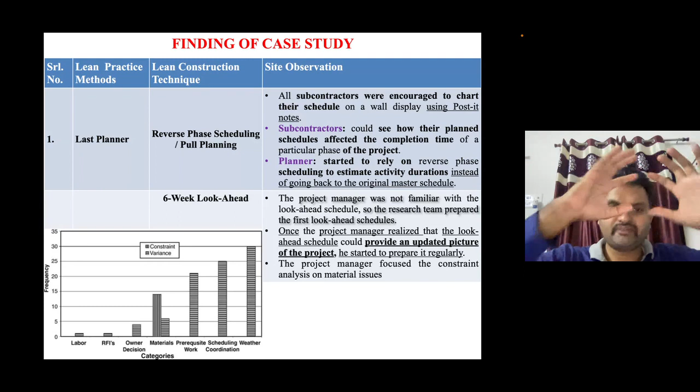So we have already started discussing the case study part, right? We have seen the last planner last time. We have seen how the last planner, when we are doing the execution part, has been moved to a 6 week look ahead plan. It means whatever broader level scale planning we have done for my project, I'm going to look after for the next 6 weeks, or sometimes in our case maybe 1 month. But in this particular site, they are seeing the element for a next 6 weeks look ahead plan. Right, so we have already seen this last time.

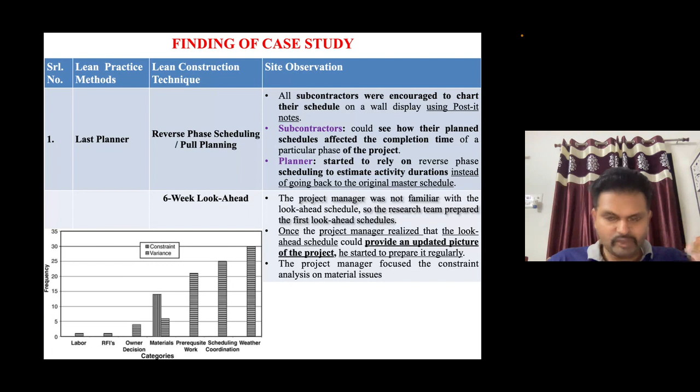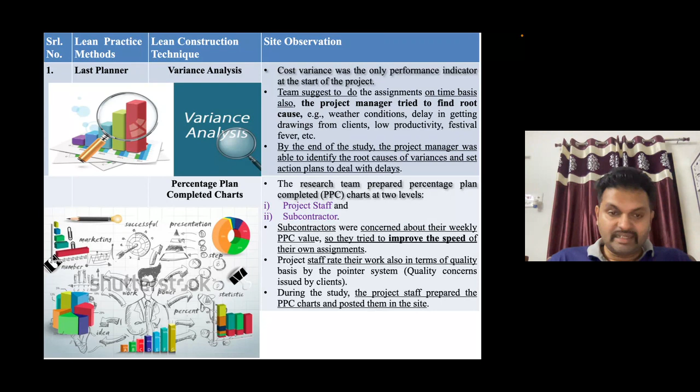Similarly, the variance analysis, right? Before that, they were just finding out or tracing out the duration. But now the project manager will try to find out the reasons behind the delay, or maybe the root cause of the delay. So we have seen the different teams available for doing the same.

Even the increase in visualization, right? In terms of commitment charts, we have already seen the GC's vice president used to sign. We have also seen the example of L&T.

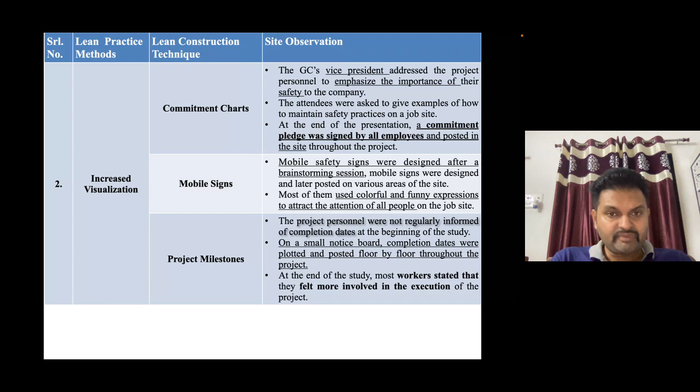Similarly, the mobile signs, project milestones, group meetings, right? In that they have created an initiative of not calling for only the engineers or managers of the front site, but even the foremen, experienced foremen, company foremen, those who are very experienced and working for the company on the company payroll. They have also been called for the meeting to give their inputs, critical for the different critical elements.

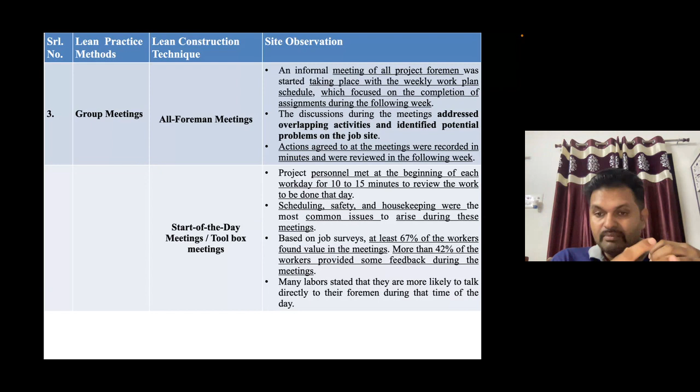Even the toolbox meeting, or we have seen the start of the day meeting. So we have seen the stats already, how many of the laborers find it interesting, how it is much more effective, right? Only by spending 10 to 15 minutes.

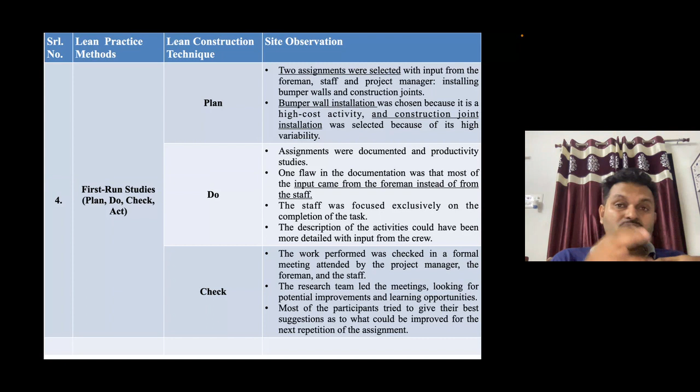Similarly, the plan, do, check, act, means the first run studies. So in that, what they carried out, they have taken two important critical elements to understand the plan-do-check-act in the site. So what they have taken is the bumper wall installation and the construction joint installation for the study of the material.

So they have done all the basic level of planning into these two construction elements of that complete case study building, right? Then in the 'do' condition, they have allowed all the inputs to come from different stakeholders, like the foreman, the frontline engineer, and the manager, and according to that the plan has been slightly modified by taking all the critical elements into discussion. Then before starting with the execution, everything has been cross-checked, everything has been scheduled into a micro level, and then the actual execution part has been done.

And after doing that actual execution, it has been found out that the result shows more than 38% reduction in the cost of the bumper wall. So you're able to see around 35 to 40% reduction in the bumper wall, which is one of the most expensive activities of that particular building, and 73% reduction in the cost of the construction joint. So that is the output which we are able to see in this lean practice followed on the site.

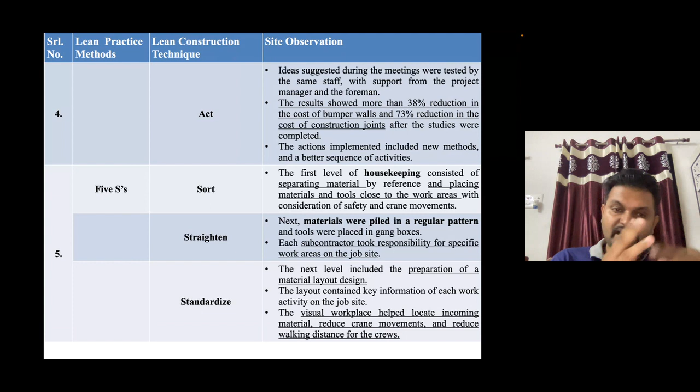Then the 5S, in that the sort means appropriate housekeeping has been done. So all the material has been sorted, kept separately into their specific areas, right?

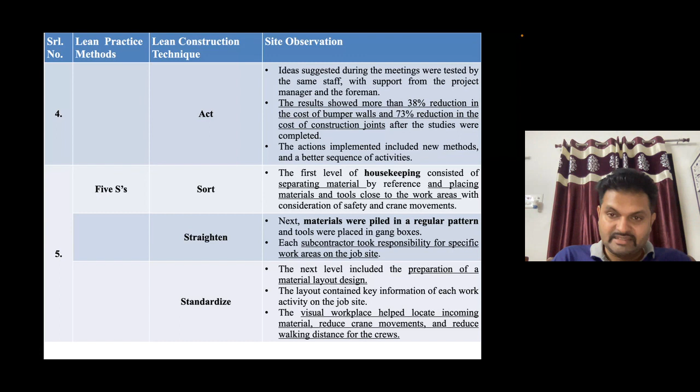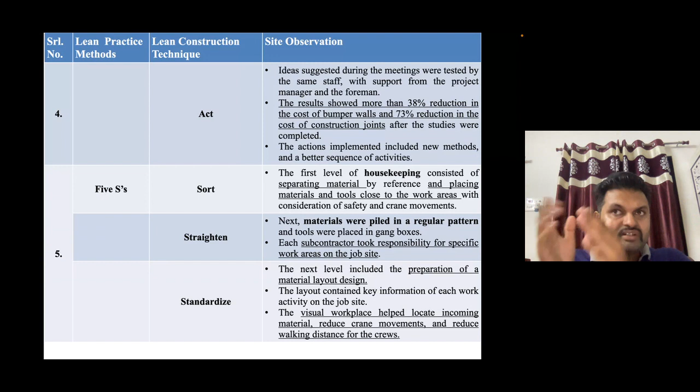Then the standardize, right? In that they have prepared a material layout design, right?

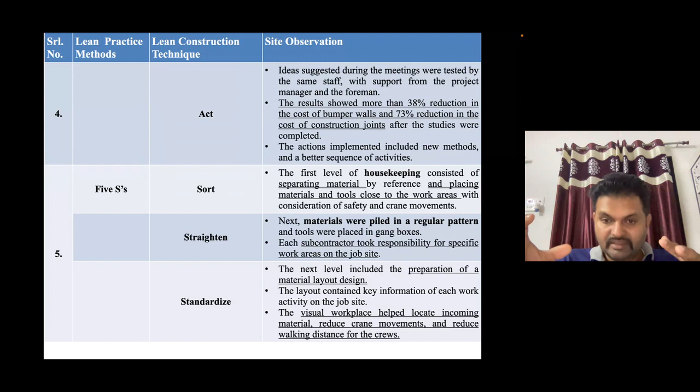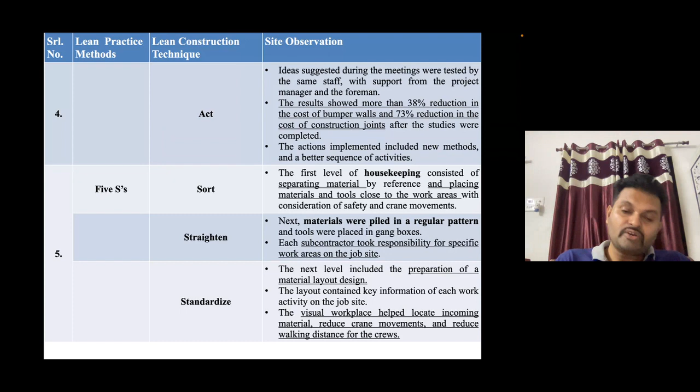The site looked much better in the visualization. The laborers are feeling much safer and much more productive on the site. There is a lot of enough space created for the maneuvering of the crane. And the repetition, what we call the principle of less movement of material, that has also been followed in this particular site.

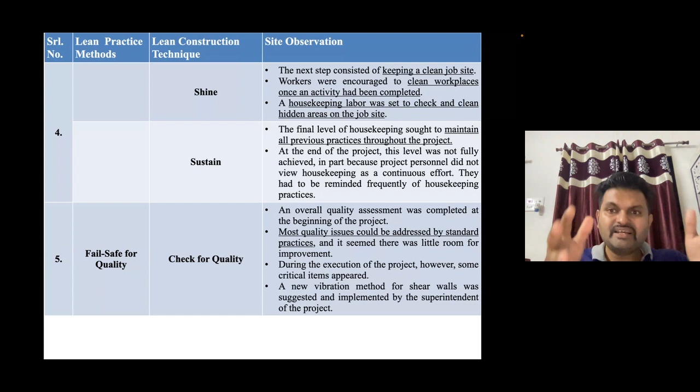Similarly, there's shine, that is keeping the job site clean. What they have done in this particular site is, out of a gang having a large quantum of labors, for example around 30-35 laborers, they have dedicated a single labor with this responsibility. That labor is responsible for keeping the site clean after the construction activity. For example, if any construction activity is going on, he just needs to check that he's keeping the site clean, or after the activity, that the workplace has been cleaned and appropriately stacked. For example, if some shuttering work is done and extra material like steel props were used, he needs to take those extra steel props and restack them where they belong in the site. So that is the work allocated to one labor of a big gang for the particular zone, as per the zoning they have done.

So a housekeeping labor was set to check and clean the hidden areas of the job site.

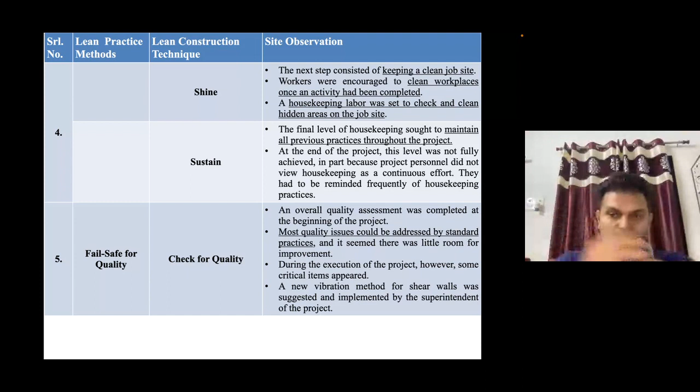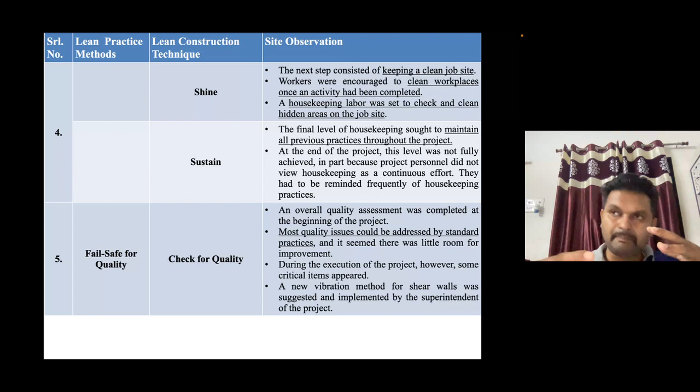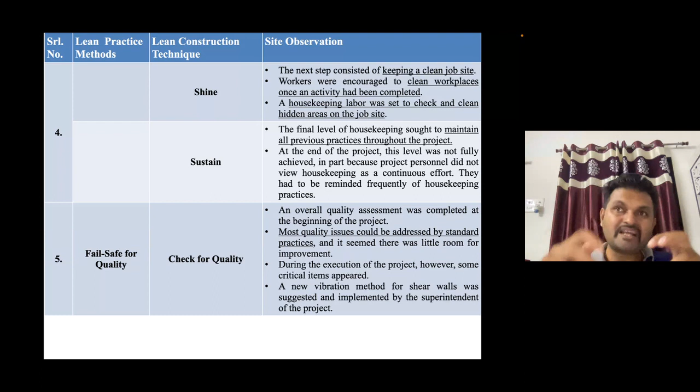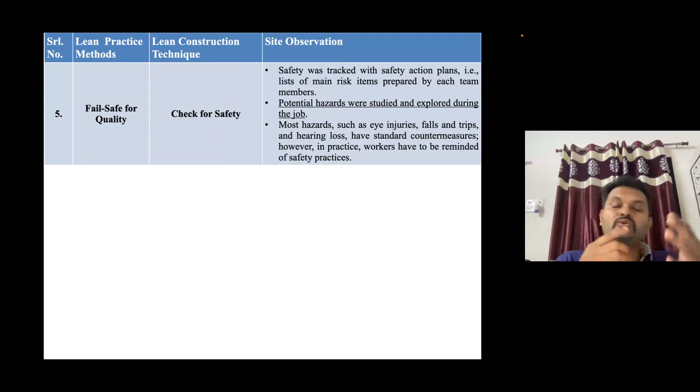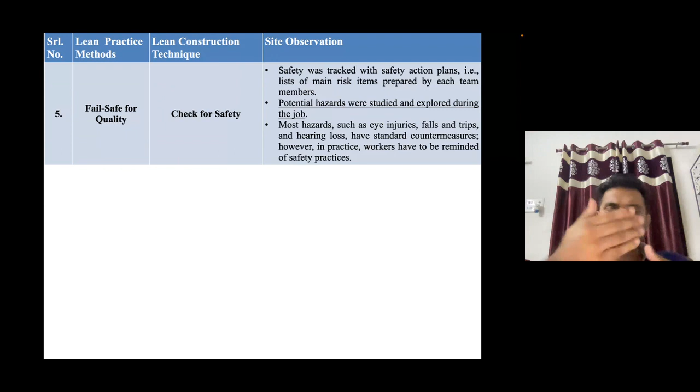Then there's the fail-safe for quality, that is the check for quality. All the things have been tried to follow with the QMS, and more power has been given to the quality person. Similarly for the safety person, they have given much more power, so they are in a more commanding position. When they are given more power, they report directly to the project managers, which gives a threatening signal to the frontline engineers that they need to follow quality and safety requirements. Otherwise, if they don't follow, everything will be conveyed to the project managers, and in reverse it may hamper their progress or promotions. So this is what they tried to follow on the site.

Okay, so we have already seen many of the parts, we have just covered the remaining part of the last element. So let's start with today's topic, that is advanced construction technology.

Okay, let's start with the first technology. Nowadays this is a very common scene, we are able to see concrete everywhere. If you're doing any kind of large scale project or high rise building, and you stand on your building at some height, you're going to find a lot of messy things around your site. This is completely a construction jungle. And the thing is very common, like the statement I have stated in the slide: Akshay, we need you right now, right here.

Some kind of spare parts were not available, or in terms of the precast site, I'm not able to find some of my components. I have unloaded some of my rebars of 32 dia, and I'm not getting it right now into my site. I don't know where it has vanished.

This thing is very common. The reason I'm saying this is that in our construction industry there are a lot of vendors, or a lot of subcontractors. So there's a possibility that one material can be consumed or used by some other parties or vendors. Here and there is a lot of possibility of getting theft, internally and even externally.

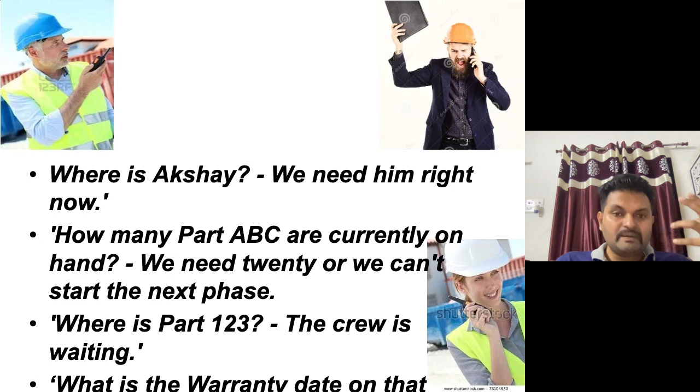These are very common things. We have kept something somewhere, and sometimes some kind of backfilling has been done, or some soil has been dropped onto that element. The element is completely hidden into the soil and I'm not able to trace it down. This is very common in our construction industry, specifically when the FSI is high, or into infrastructure projects.

But the issue is, what is the solution for such kind of things on our site? This is our first learning, or the first technology we are going to explore in today's session: the RFID, radio frequency identification device, in the construction industry.

Let's try to understand what exactly that is. This is not any kind of advanced technology. We have already used some part of it in our day-to-day life, but it is a little bit different. Let's understand the basic concept. RFID is a radio frequency identification device. It is basically an automated data collection technology. It is a wireless, non-contact system, and it works on the basis of a tag system, or a tag attached to it.

I will try to illustrate this with a very simple flow diagram. Just try to understand: RFID is like a paper kind of element, just a small paper, this much size. It is having a chip inside.

I am going to put that chip into my material. Just take a case, I am having a precast beam. I put that paper and stick it onto that beam, so that it is not going to wear and tear due to rain and all that - so that is a safeguard. I'm just going to paste, or stick, that RFID onto my precast beam.

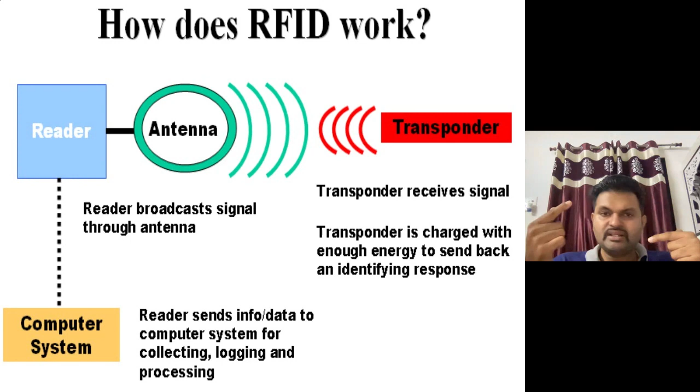So the working is the same. The active system has a battery, and a passive system does not have a battery, but the overall function is going to remain the same. Let's try to understand the difference between the two different tags available in the RFID category: the first is active and the other is passive.

In terms of power source, active RFID is going to have an internal battery. Passive does not draw from a battery; it draws power from the reader. Once the reader emits the signal, an electromagnetic field is created, and the tag starts to get power from that, and then it transmits the signal.

It takes them around 2 to 3 minutes to get charged, and then they reflect the signals. Typical lifespan is around 10 years for active, and passive is unlimited, like they go for 15 to 20 years. So I can reutilize this RFID into different projects also.

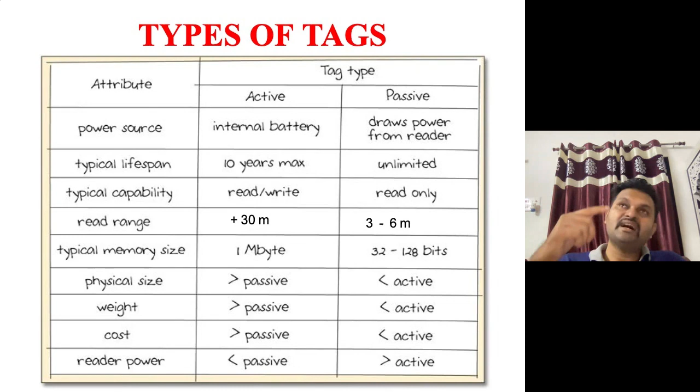Typical capability: in active, I can read and write. Once I allocate some system to that, I can rechange it, I can make it do a lot of differences. But passive is only read-only.

Read range: an active system goes for around 30 meters. If I want to go beyond 30 meters, if my infrastructure project is very big, I just need to install something to strengthen the signals. They can go for around 25 to 30 meter range. I put some antennas to take the signals and again strongly emit for the next 30 to 50 meters of range. So I can put an antenna if required.

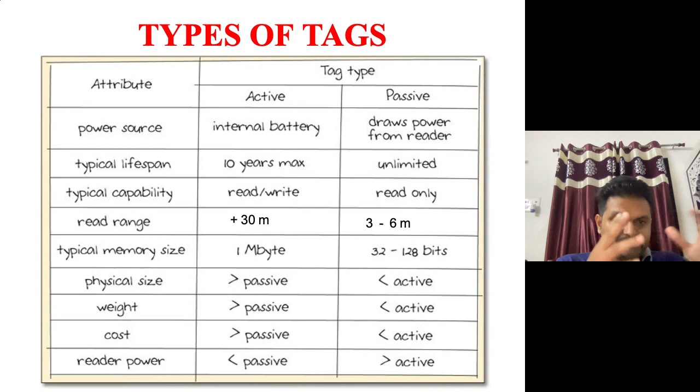Passive has a 3 to 6 meter range. Typical memory size is around 1 megabyte for active. For passive, it goes for around 32 to 128 bits, approximately the memory of a SIM card. You also have memory in your SIM card, where you can save numbers into your phone. That is the similar memory a passive type system has.

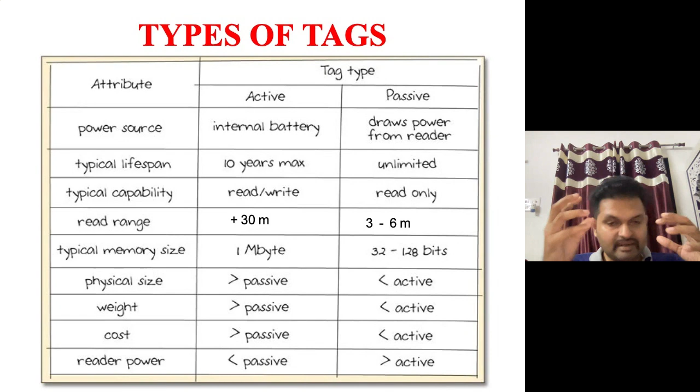Then if I talk about size, weight, and cost: active is a little bit more in size, more in weight, and a little bit more costly compared to the passive system. But the reader power is less for active and more for passive.

If I'm talking about the cost element, for a passive system, it depends on how much quantity you are ordering. For a quantity of around 500 to 800, the cost for a passive system goes for around 5 to 8 rupees, and for an active system around 12 to 18 rupees. That depends on vendor to vendor, how much competition there is, and how many tag systems you are buying for your site.

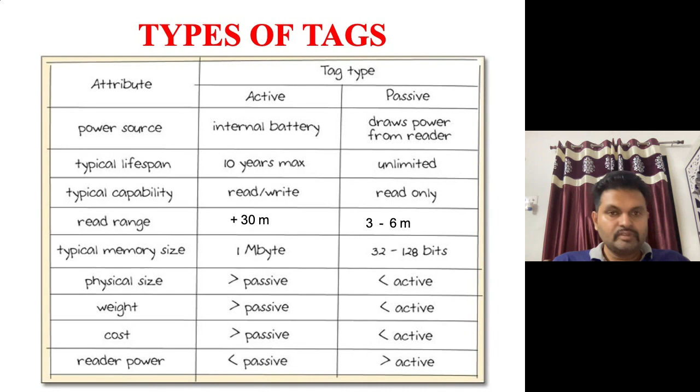There are a lot of competitive technologies. This is not the first time we are using this, nor is this the first generation of this particular technology. So let's see what are the competitive technologies which we use in day-to-day life.

For example, barcode. Most of the products which you buy from any mall or any recognized manufacturer company have a barcode. OCR, optical character recognition, is a little bit expensive, so it's mostly used in developed countries. Smart card, you've mostly seen office ID cards having smart cards. You just swipe it, and punch in, punch out is done, or door open is done. That is called the smart card. Biometric, you just need to do the punching. Similarly, we have biometric, face recognition, and even voice recognition.

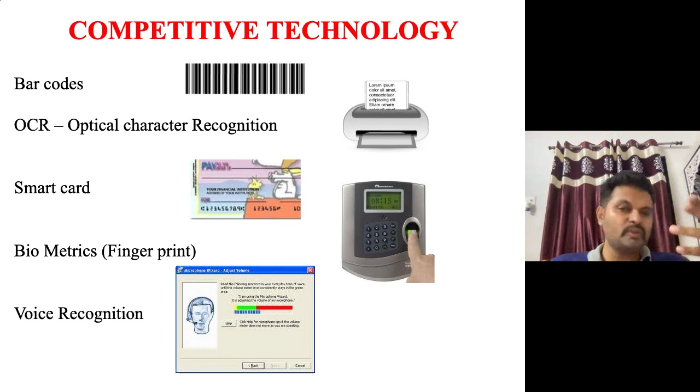Now, the most commonly seen among these is barcode technology, right? It's the most popular of all these competitive segments. So let's try to compare RFID and barcode, how RFID is much more suitable for our industry, and why it has been used and explored in our industry nowadays.

First of all, with barcode, whenever I need to detect it, the product needs to be in front of me, and the barcode detector needs to be in front of that product only. Only then am I able to recognize it, right? If I keep my material somewhere around and do the scanning without putting the laser in front of it, that is not going to be detected in the case of barcode. But RFID does not require any kind of line of sight. It transmits the signal for 360 degrees, so wherever my material is, I'm able to find it.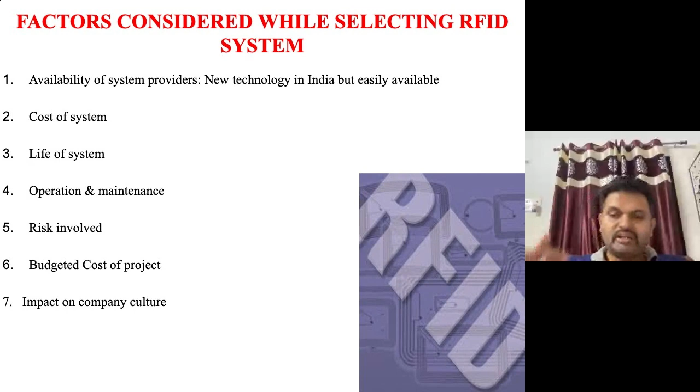Now let's see where I can expect applications of RFID in my industry. The first is security. How exactly can we put it into security?

Just take a case of security. Whenever my labor is coming into my site, if they have an ID card, in terms of security and even labor productivity, I can use it for both. How? I will tell you. Just take a case, there is an ID card allocated for all the labors, even for the staff.

So there will be an RFID tag within the ID card, attached between the front and back papers, so it's not visible to the labor. Every ID card I issue, I know which gang member it's issued for, whether carpenter or whatever, or even the name of the person I can write down, and I can assign different colors for different gangs as per my understanding.

That ID card can be used for access control and security control. Whenever they get in and out of the gate, I'm able to capture that. And it can also be used for productivity control.

Let me tell you, in the software, many RFID systems allow a boundary line. If I say within 100 meters, as per my project size, and if any person goes beyond that 100-meter range, I need to get intimation. So whenever someone carrying that ID card moves outside the 100-meter range, I'm going to get a pop notification, and that point is shown.

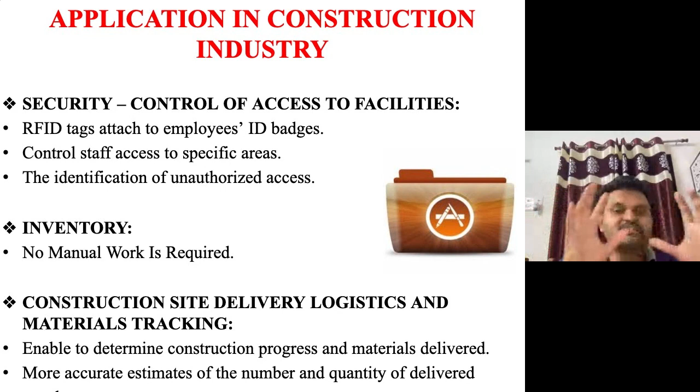It may show in blue, meaning he's a carpenter of this gang. So I'll know that person, say Rohan, is going beyond the limitation line I have set. It may be their working zone or my site boundary. So whatever boundary I've set, if they go beyond it, that means he's just wasting time on site, or went for lunch, or whatever. I can easily track that.

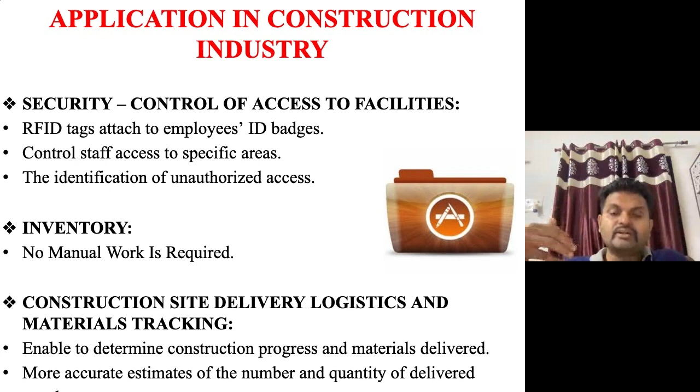Next, inventory control - no manual work is required. Definitely you get a lot of automation because of using RFID. Construction site delivery and logistics - if any kind of material is coming in, or sometimes RMC plants for concrete, or other materials, I can easily track them.

Document tracking is very important. For example, one of the most important and critical elements is billing. Whenever our file moves from my site to the client, it depends on how the flow works in my site. Sometimes from my planning department it goes to the consultant or execution team, then to their senior, then to the client side, then to the accountant. So it's very difficult for me to track every time.

I need to call and ask if the file has passed or not. To track whether the file has passed here or there, or now reached the accountant - if I have just a tag system in my file, I'm able to find the location. I get to know it's now with my senior consultant, now it's moved to the client side, now it's moved to the accountant. So I have a direct tracking system.

If I find out the file has been sitting for a long time, like 2 or 3 weeks, in a consultancy firm only, I can just give a call and ask if there's any issue or technical concerns, because I notice the file has been on your table for a very long time. And it just looks like a paper tag.

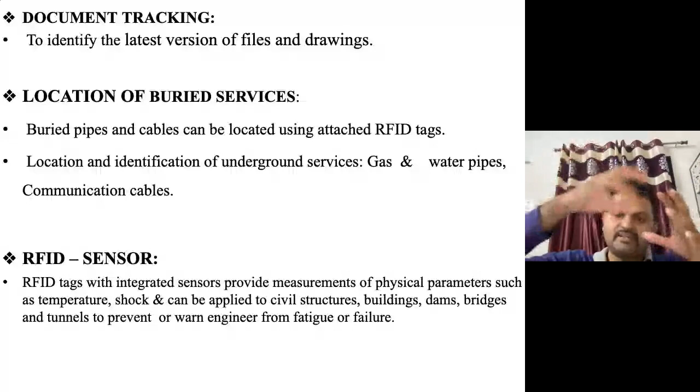So it's nothing like I'm changing the file location or file outlook, nothing like that. It's just like a paper file separator. It's going to look like that only.

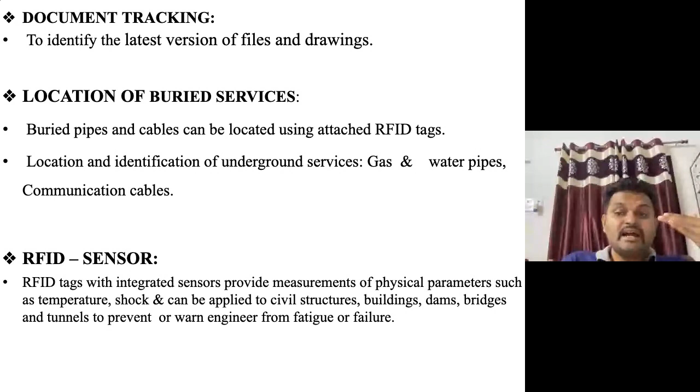Location of buried services is a very good part of this, because our industry has a lot of soil movement, everything is mobilized around. Many times there's a possibility that costly elements or materials fall into the backfilling or get covered with earth. In that case, RFID is able to trace the material even if it's buried 2 meters below the ground. For any reason, if soil has fallen over my material, I'm still able to identify the material up to 2 meter depth. That is a good part of my RFID system.

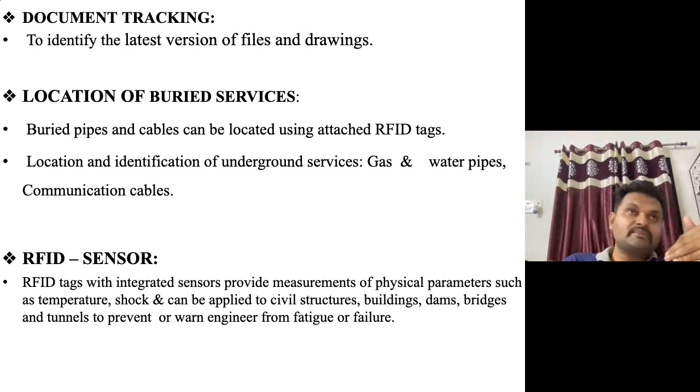RFID sensors - even some trial modes are going on where RFID can be attached to concrete, so that any kind of changes or thermal changes can be detected. Even RFID application is being tried in the field of dams, where we require a lot of monitoring. So if any changes are there, RFID can sense it. Some sensors are tried with RFID, so by using those sensors, RFID gives me signals of what is happening, and the concerned person can take steps accordingly as per the need.

So what I can conclude is that RFID is a little costly, but it has great advantages over the barcode. Even though the technology hasn't fully matured, there are a lot of opportunities. A lot of sensors can be put around with RFID, and many experiments or trial modes are going on. It's going to have very good customer service and more productivity on my side, and it's not that much of a cost element. It requires hardly a small amount, but has a wide range of applications, which makes my site much safer and an easier workflow.

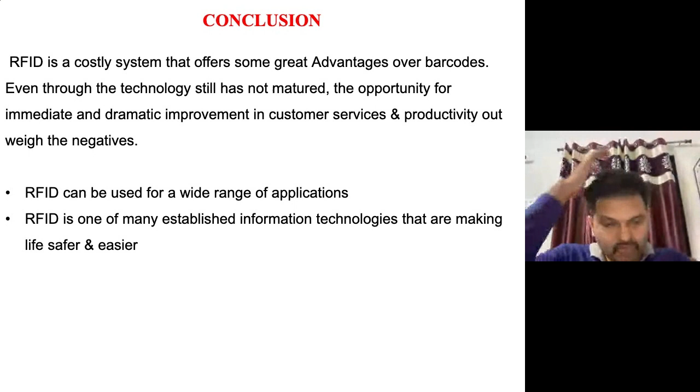So let's move to the second part of the technology we're going to explore. But before that, if anyone has any doubt about RFID technology, let me sort it out, then we will move to the next technology part. If you don't have any doubt, you can just say yes, continue, or we can go to next. Okay, good enough, so anyone is putting a question? Okay, so I hope we can go to the next, right? Okay, good enough, let's move to the next.

So the next technology is precast and modular construction, which I have written. Precast is not a new technology, but to give you the flavor of modular construction, I'm going to start with precast technology. Let's try to see what exactly that element is. We know precast technology - for example, there are two types of technologies: one is cast in situ, another is precast. Cast in situ means where I require that element, I am casting it there only.

For example, there is a plan and I require a column here. If in the plan the column is here and I'm casting the column here, that is cast in situ. But if the column is needed here and I'm doing it somewhere else - it may be on my site elsewhere, or in a manufacturing plant, or somewhere in another state - that's also fine. Everything comes under the category of precast. So I'm casting somewhere else, that is precast, and then assembling at that particular point.

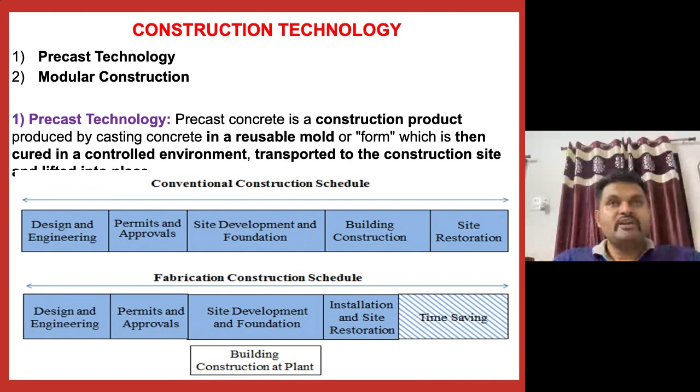But today we are not going to discuss precast technology. We are going to discuss modular construction.

For example, India has constructed, in 2013, around a 10-story building in 48 hours. So generally a normal six-floor or eight-floor building takes years to do, and how exactly are they able to make it in 1 day, 2 days, 48 hours, 56 hours? How exactly is that possible for a 10-story building? Everything is possible in modular construction, right?

Basically, modular construction is an advanced level of precast technology.

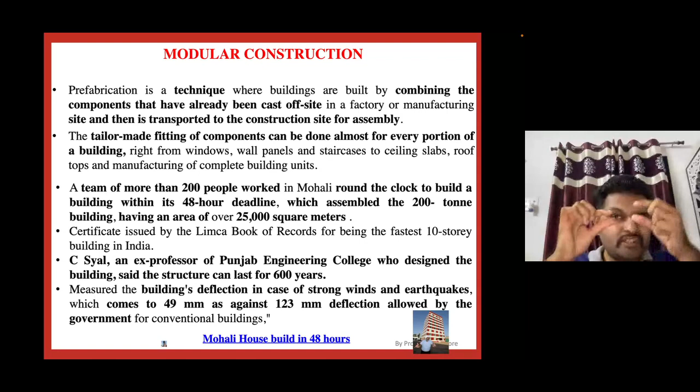I'll tell you an interesting fact. Take the case of AAC block, that's a different story. But when we have mortar in between bricks, whether red bricks or AAC block bricks, the main function of the mortar is making a key element. But the other function is that if any horizontal force like an earthquake comes, this mortar, which is not as solid as the blocks or bricks, tries to absorb that horizontal energy.

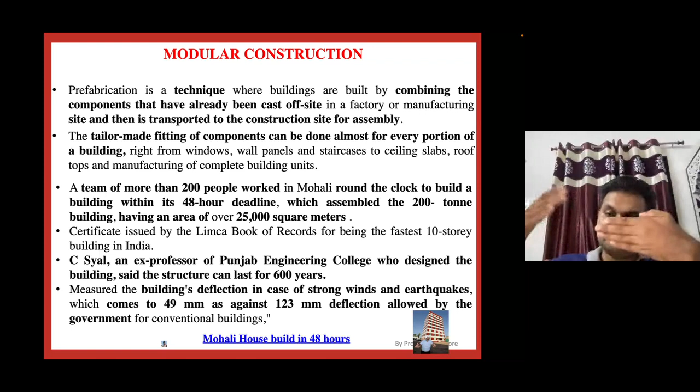For example, if I'm getting a force around x, in this part I'm going to get x minus some value, because in between the mortar tries to absorb that energy. But if the complete wall is solid, then if an earthquake comes, whatever shock I'm getting here, the same shock I'm going to get because it's completely solid.

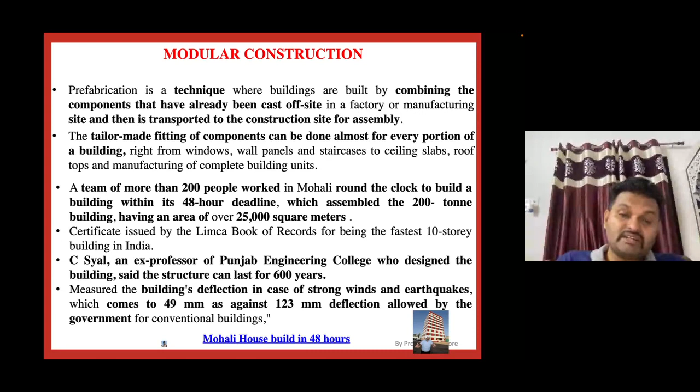But when I'm talking about modular construction, they have nut fittings, so the possibility of absorbing energy is more. I can reflect this with an important example. When we talk about building deflection, generally a standard 10-story building in a particular zone gives a deflection of around 123 mm. But the same building designed with modular construction gives a deflection of only 49 mm. So you're able to see it is much more secure compared to RCC construction.

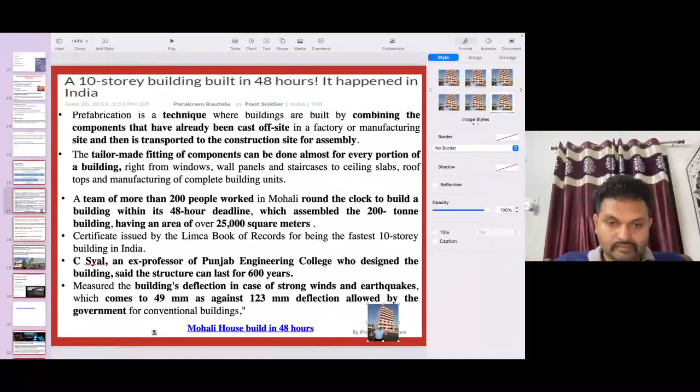Now some of us ask the question, why is the modular method important for buildings? Let's see. I'm not saying it is important or not important, but the reason is that in our construction industry, time is cost. Definitely, the more time involved, the more overcost and expenditure is involved. Because of the high cost, or the large time for construction, I'm able to convert that cost into the benefit of rapid construction.

Wherever I want rapid construction, I'll give an example of why it is needed. Take the case of the COVID scenario. If I need to do hospital construction, any kind of element, in a conventional way, it may require a long span. But by using modular construction, I'm able to build a large number of hospitals in a very short span.

Take another case, any country going for an international competition or conference where a lot of countries are coming. For example, Japan conducting the Olympics, or take an example of 2032. In that case, they need to make a lot of stadiums. If they go the conventional way, it's going to take time, and there's a possibility of project delays.

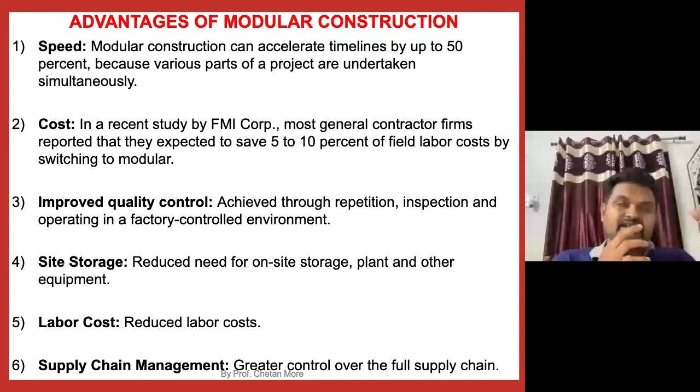Very high quality, much better finishing you are getting. Wastages are very less, right? Inside you require very less space for storage.

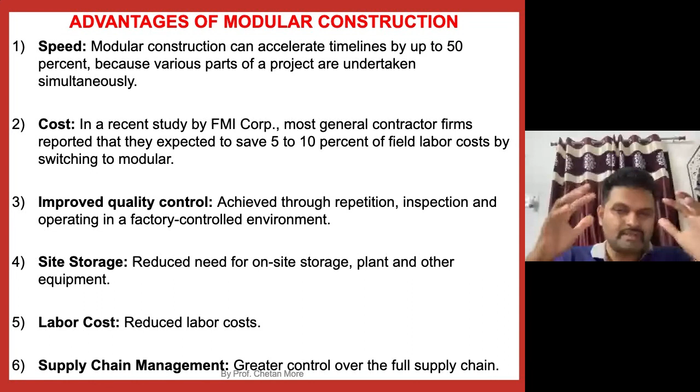So where the site is compact, where the FSI is very high, and the site is small because it's a high-rise building, you're not having much space to keep the materials. In that particular case, I can easily go for modular construction.

The labor cost is definitely on a lower scale. There's greater control over supply chain management. I don't need to depend on a lot of different vendors for different materials. I can have very good control on that.

Minimal impact on your business, right? For some kind of project where right now I'm not having that much cash flow, but in the future, without hampering my current building or current business, I want to go for extension.

Just take a case, I'm constructing an institute. I know that after some 3 years, I'm going to add three more stories to my school building. But I know that for a school building, if I'm adding two or three more stories, I need to close the building completely for a minimum of 6 months or 1 year. So I can't stop my school, college, or university for 2 years or 1 year or even 6 months. So how can I do the construction?

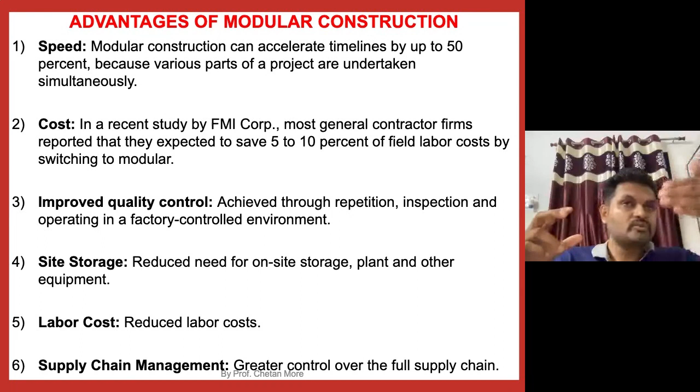In that case, I can go for modular construction, because even after the university, college, or school is over, I can do the construction in the remaining 5 to 6 hours, and still I am able to progress my work without hampering my existing business, right?

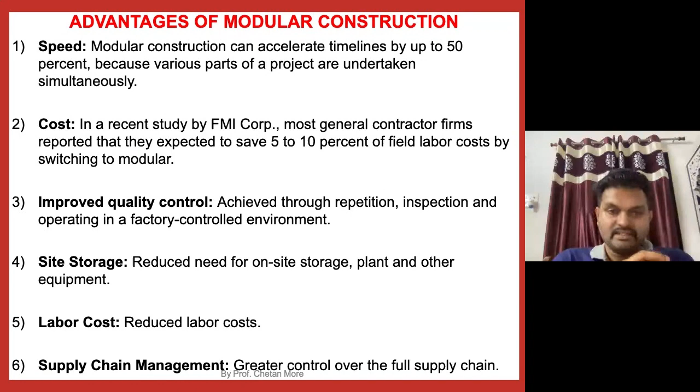Custom-made options are available. Whatever changes I want to do, I can easily do, and there is very less wastage at my site, with no doubt.

Definitely there are also going to be limitations, right? First of all, if I'm not going to follow proper procedures, such kind of accidents may happen at my site. Even the unavailability of technology is one of the issues we are having. Skilled labor, those who know modular construction, that is a lack. Even the lack of standards, right?

I will give you an example, like Modulex India. So if I'm talking about the prospect of India, Pune and Mumbai are very good in construction developments. Modulex India has invested somewhere around 100 crore, and they have made a factory in Indapur, so they can send their materials to the Pune and Mumbai real estate or construction industry businesses. So there are a lot of technologies being driven into the country.

Still, I understand you may be getting the basic concept, but there may be some concerns you may be having, like how exactly it will be done at the site. So I will illustrate a video that is going to sort out all your concerns and doubts.

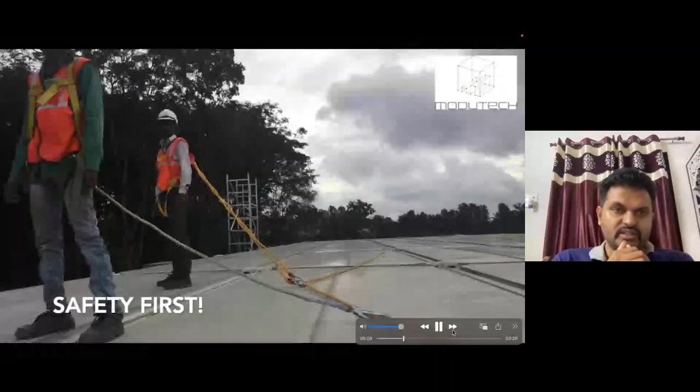So in this Pune site, there are a total of 36 modules. These are the complete modules. If you're able to see, all the metrics are within that module only.

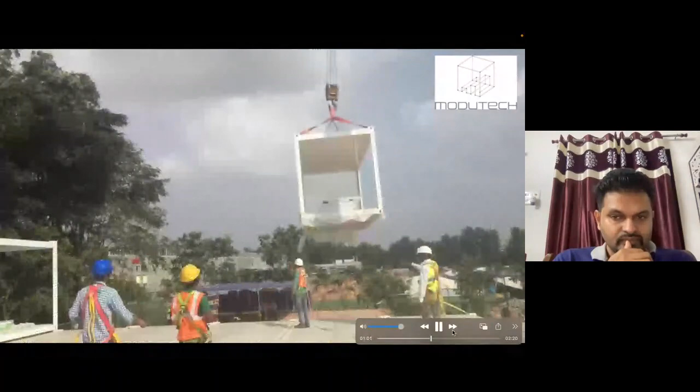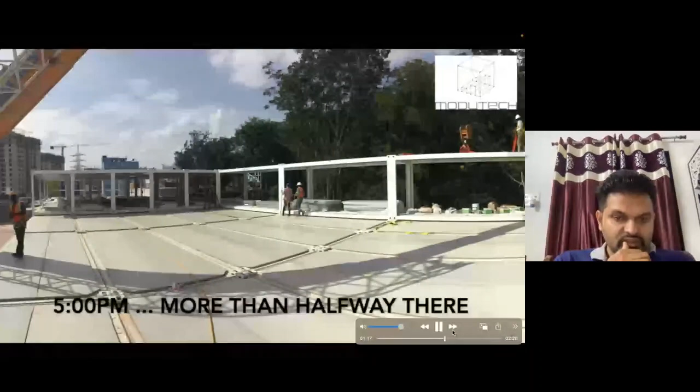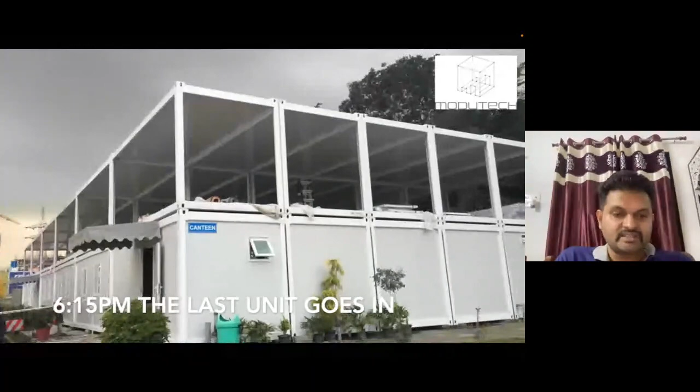The project started at somewhere around 3:30 p.m. By 5 p.m., almost half of the work is done. By 6:15, all 36 modules have been put into their places. Then bolting down of the units is taken care of, and safety verification has been carried out.

So the ground floor keeps working as functional, not hampering my current business. After 3 weeks, the complete work has been done in all respects, even with the interiors, all the plumbing, all the electrical, all the water sanitary fixed. Within 3 weeks, the complete office setup is ready to use.

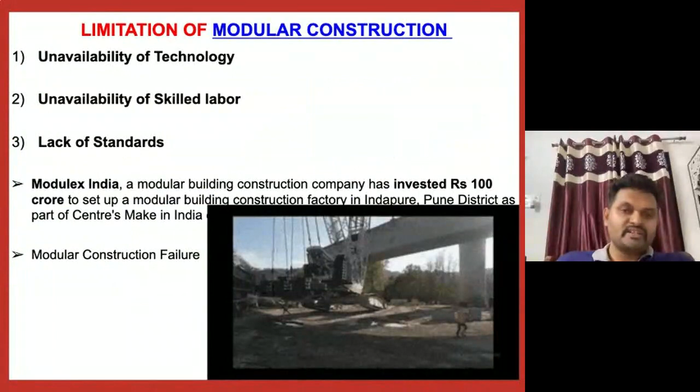So this is the way it works. Now you get better clarity on how exactly the modular construction has been doing the work at the site.

Now let's move to the next technology, which is 3D printing. Everyone enjoys 3D movies and 3D animations with great VFX. Similarly, with 3D printing, if around 5 or 10 years ago someone said you could construct a building using a 3D printer, you may have laughed at that. But today this technology is possible. Let's try to see what exactly the technology is, how it works, what the status is in different parts of the world, and how much they have advanced.

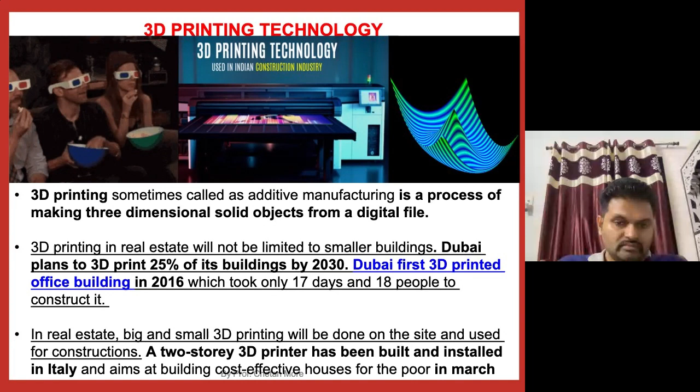But let me tell you, currently the highest building done in the world using 3D printing is only a two-story building, not much more than that. Before I go into more detail about the technology, I will show you a video so that we understand how exactly the work has been done, then we will move to the next part.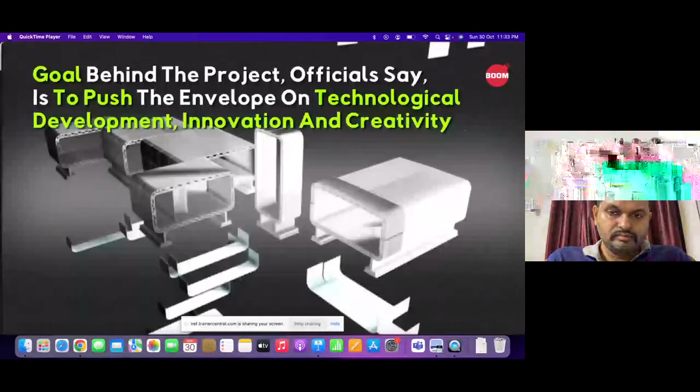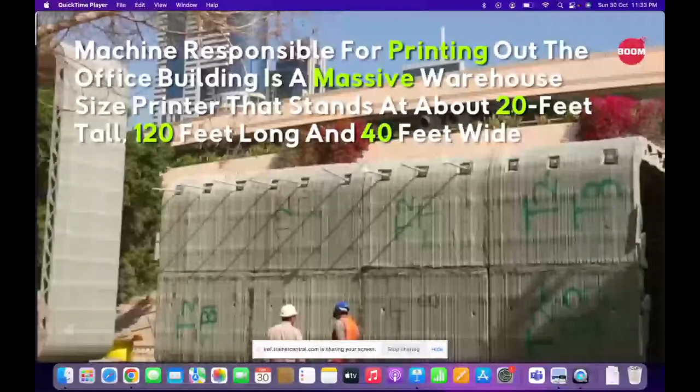So you can give any kind of shape, any kind of bend, by using 3D printers, which is very difficult with modular formwork.

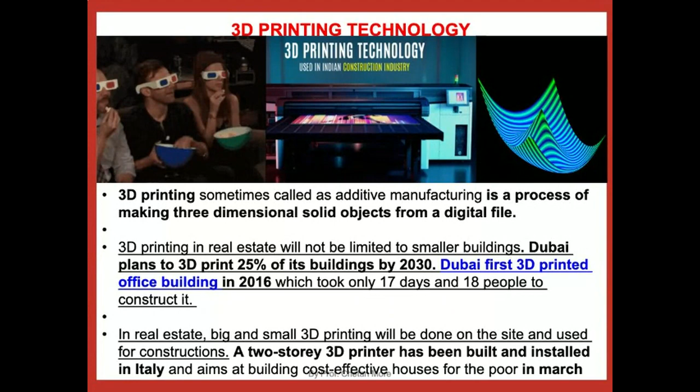Now let's get into more detail. Let's talk about the first 3D printing in India. As we said about Dubai, when we talk about adopting new technology into the Indian construction industry, even with precast, it took approximately 2 decades to come into the country. But now we are seeing developing countries adopting advanced technology much faster. Just take the example of 3D printing technology.

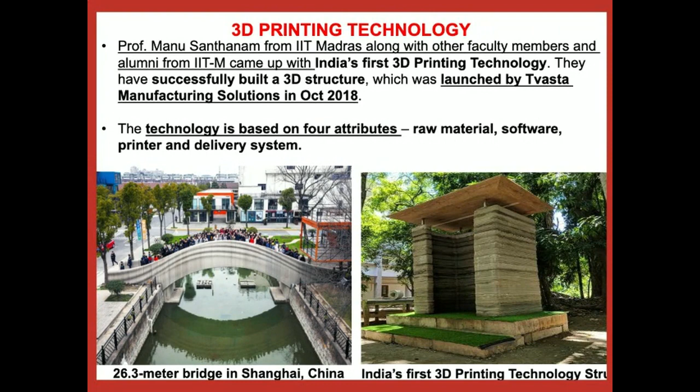In 2019, India completed a complete bungalow of around 600 square feet in April 2019 — the first fully independent bungalow using 3D printing technology. There are still around 4 to 5 places where 3D printing technology is being used in different projects by Tata and L&T.

Now I've taken different snapshots of small simulation models done all over the world, because many countries are trying to use 3D printing technology for building construction, but they're just making attempts, taking learnings from simulation models of small structures. So how exactly does this 3D technology work?

Let's try to understand the steps. First, you create the BIM model — the Building Information Model.

You're going to have a stereolithography file, similar to layers. Different layers are there, slicing is there. That's the input, and you need to use the software of the 3D printer.

Right now, in the world, there are around four construction 3D printer manufacturers. Other plastic manufacturers are there too, 3D printers that work with plastics. But if I'm talking about construction 3D printers, only four manufacturers are there in the world. So whatever machine you are using, the same software you need to use for creating the slicing and the layering.

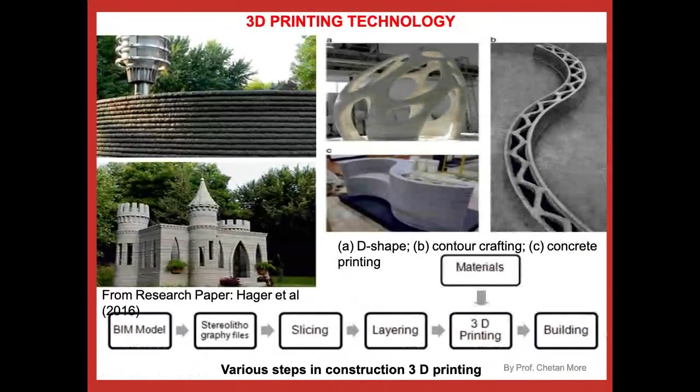So if I'm talking about the advantages of 3D printing technology, there are a lot of advantages, no doubt about that. But before that...

One of the issues you may face - you may have a query, sir, when the 3D printer is working, you may have seen they work like a Colgate kind of element, like toothpaste - you put pressure and a gel comes out. Similarly, the 3D printer is also erecting the concrete, moving this element with some slow speed, moving in a horizontal way.

Generally, in real life construction at our site, we go in a vertical way, but they do it in a horizontal way. The reason is that going horizontal throughout gives time for the first layer you put to settle down. So once the first layer is set, you wait till the robotic arm reaches that first poured layer that has set, and then it puts the second layer around that.

All the pores you're able to see get filled as per local conditions. For example, if it's a cold place, you fill with foam so temperature doesn't come inside. Sometimes we keep it as hollow as possible - that depends on local site scenarios and conditions.

Even some tests are going on using geopolymers with the concrete. Even GFRC, that is glass fibre reinforced concrete, is being tried in combination with concrete in the 3D printers. So when I'm talking about the advantages of the 3D printer, definitely there's reduction in cost.

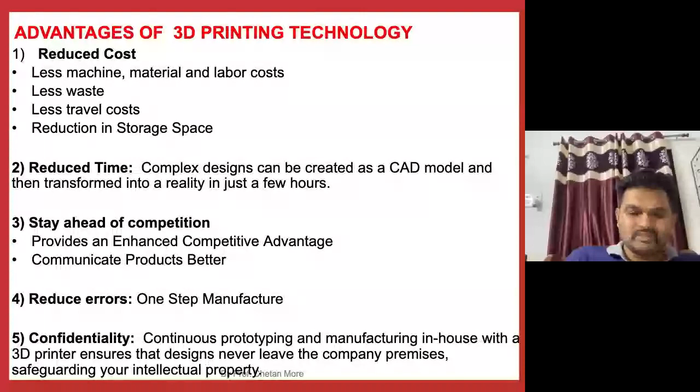Next, confidentiality of the project, specifically in some projects like defense or satellite-type projects where you need to keep confidentiality, or it may be some kind of manufacturing plant which wants to keep secrecy of the plant or whatever the element. In that particular case...

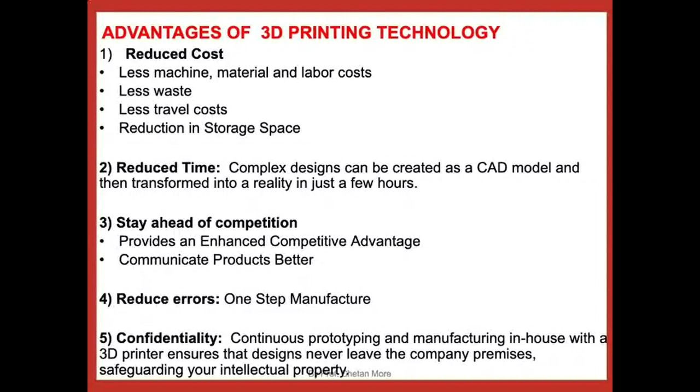Whenever I go for use of conventional building, definitely I need to involve a lot of vendors, a lot of laborers. When I'm using them or taking the help of laborers, vendors, or subcontractors, definitely I need to share the details with them. I may need to share the drawings with them. In that particular case, the confidentiality of the project may be lost. 3D printer is one of the technologies which is going to make sure that the confidentiality of the project remains intact in your project. You no need to go for losing the same. That is an important element.

Next, if I'm talking about production on demand, that is one of the advantages. There is no need to keep a stock, or control or maintain some kind of inventory, no need to bother about the same. As per the demand at the site, you can start the production as per the demand. It is fully customizable. Whatever the requirement as per the client, you can do custom changes into your drawings, and that is going to do the actual costing of the same.

Definitely one of the technical issues I will tell you about. When we are constructing a building, if you're having openings like doors and windows, at that time you need to just, like the 3D printer, as you give the drawings, it is going to give a space, empty space in between. So the distance, they're going to do analysis of the same, they're going to keep a proper distance. If you need to provide some kind of building or wall above the opening, definitely you need to provide a lintel, then you can do the construction on the lintel also. So this is the technical glitch which we are going to get while doing the construction activity.

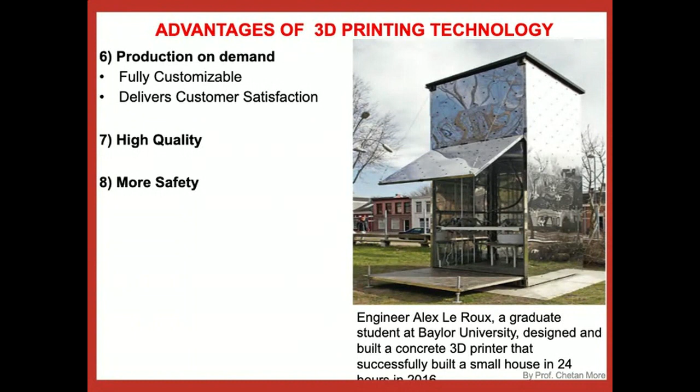So irrespective, you may be concerned about jobs, but it's not going to happen much, because the same thing was said when precast was coming into the country - everyone said labor requirement would be less. But believe me, construction industry right now in India provides the second highest employment of any industry. The first is agriculture, and second is construction. We adopted precast around 3 decades ago, but we still have the highest number of employment in that sector. So don't bother about that element.

Now the thought for the day is: let our advanced worrying become our advanced thinking and planning. That is from Winston Churchill.